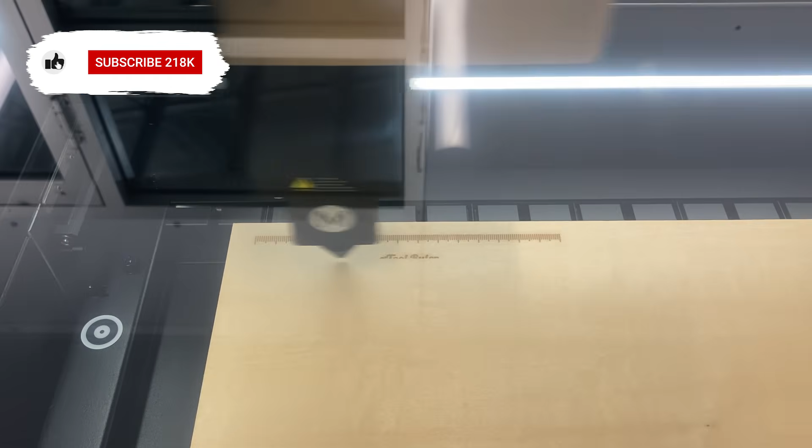In this video, we're going to get you all the way from not knowing what a laser cutter is, to getting your very first thing cut on an xTool P3. We'll start with some important safety, then look at how to create the design file you need for the laser cutter, then process it with xTool Studio software, and finally cut it out.

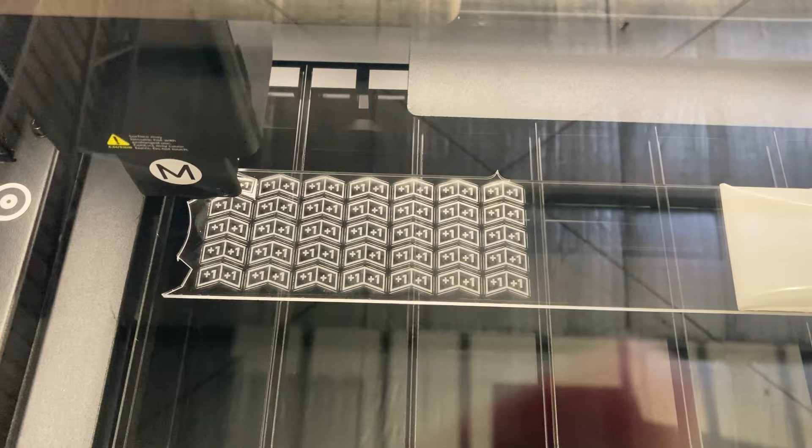Before we begin, this video may see usage in a public space such as a library or makerspace. If you are a member of the public using this machine, always double check with staff in case there are unique procedures or steps specific to your space. And of course, if you're watching this with your own P3 at home, do whatever you like, it's your machine.

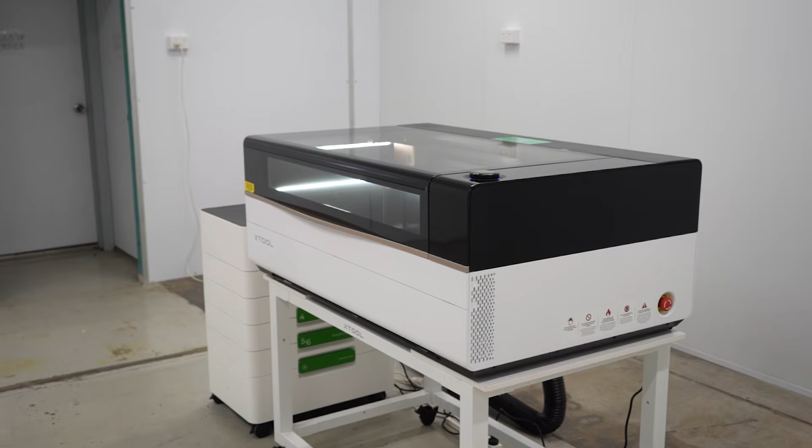First things first, safety. This machine is designed to be safe, and if you're using it properly and respecting the power it's capable of, you are not going to have any worries using this at all. Now that said, let's talk about some of the things this machine is capable of if you're not operating it correctly. The xTool P3 is a CO2 laser.

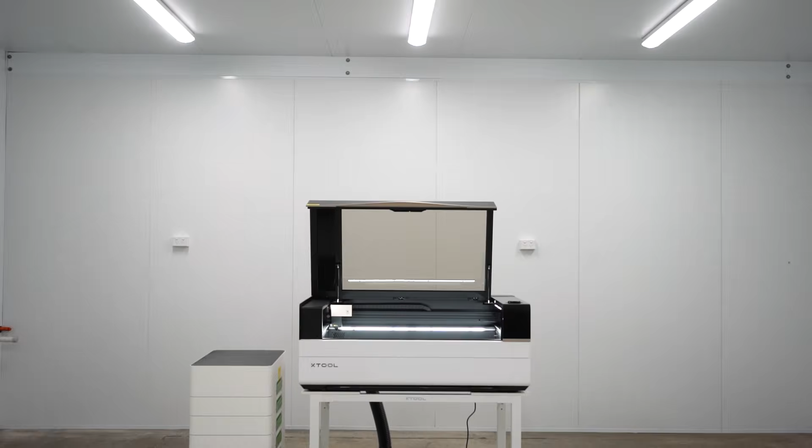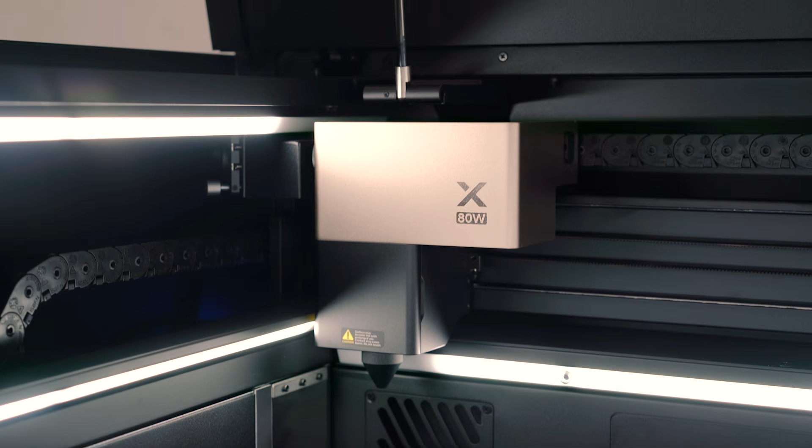It creates a super high power beam of invisible light that is bounced around with some well-aligned mirrors so that the laser enters the cutting head here and shoots down right into your material. The laser is focused down to about the width of a human hair, and this means that it's super concentrated and creates so much heat that it just vaporizes away material.

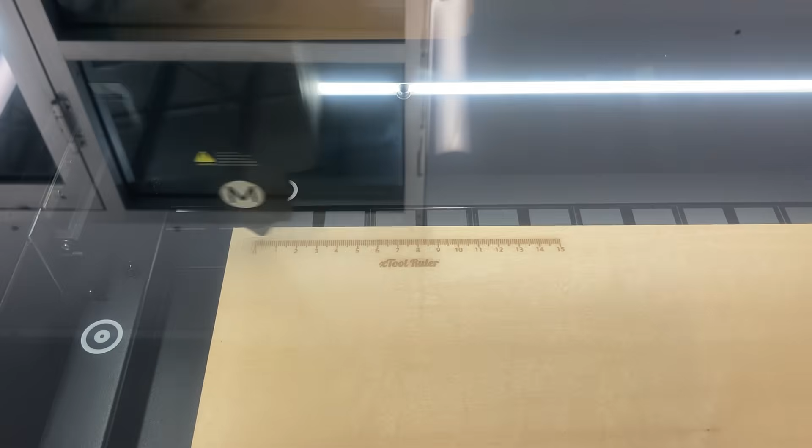With this, it makes it really easy to cut plastics and woods, metal a lot less so because it just reflects right off. The machine can also drop the power of the laser a little to instead burn the surface of the material, and this means it'll engrave the surface of your material instead of cutting it.

First things first, the laser is a danger in of itself. It does not discriminate between skin and wood, and it can instantly blind you if it reflects off something and hits your eyes. Now, we don't mean to scare you here because machines like the P3 are really well built, and that top lid is a special kind of glass that keeps all the invisible lasers inside the machine.

Additionally, the machine is designed to not work if the lid is opened. As long as you are using the machine correctly, it's safe. It's got the same laser class safety rating as a DVD or CD player. Those devices also have lasers in them that can cause eye damage as well, but the design of them means they're safe to use as long as you don't take them apart or modify it.

The second thing, this is a controlled burning. It's uncommon but not impossible to start a fire in this machine. You must watch the machine at all times while it is cutting in case a fire starts. If you leave the room, you must pause the job.

Even at MIT, there are cases of students quickly going out to get a coffee, and when they come back, half the lab is on fire. These fires in a laser cutter machine start really, really small, and if you catch them early, they are very easy to put out.

And finally, only cut materials on an approved list. The real danger is that not all plastics are safe to laser cut. Things like vinyl and PVC have chlorine in them, and when you vaporize these plastics, you create chlorine gas, that chemical weapon they used in the trenches in World War I.

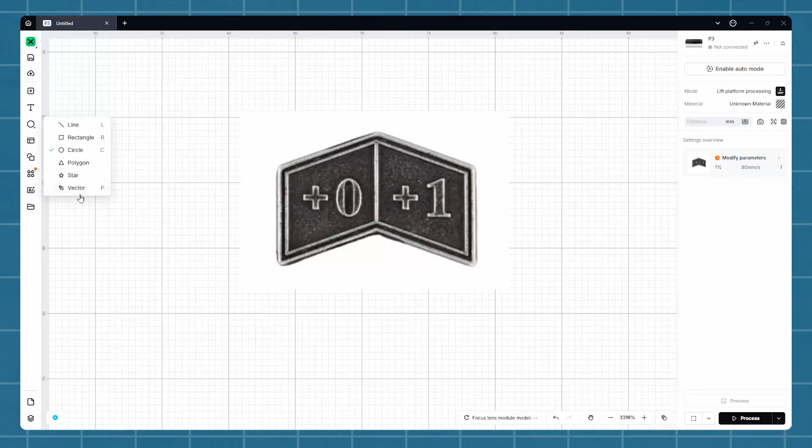xTool Studio has some basic drawing tools to make simple designs in it, and it's fairly straightforward. We will be doing a quick tutorial of this in the next step, by the way.

If you're looking to design something a little more complex, you might want to use an external software. The two biggest are Adobe Illustrator, which you have to pay for, and Inkscape, which is free. Both have their quirks, but both can do the job just fine. We're not going to do a tutorial on how to use these, as there are a million tutorials on the web already.

If you're getting your design file externally, you'll need to save the file as either a DXF or SVG. These are some of the file formats that xTool Studio will import. And just because it can be confusing the first time you encounter it, these are vector files.

Most of the time, an image is made up of pixels, and as you zoom in, it gets pixelated. We call this a raster image. Vectors, on the other hand, which is what our laser cutter needs, are images made up of lines defined with math, as in there's an equation telling how the lines should move. This means you can zoom in forever and never see a pixel at all. You don't need to be an expert on this, it's just a bit of context that helps, since we're dealing with vectors instead of raster images.

Alright, let's get going with xTool Studio. Go ahead and download it from the xTool site and follow the installation instructions. Nothing really fancy going on here.

Chances are, if you're cutting in a public space, there will be a certain computer connected to the laser cutter that you'll need to use to send your job to the P3. However, we can install xTool Studio on our own computer right now, design it and set everything up, then just put our file on a USB or something and open it up on the computer connected to the P3 and cut it out. So first things first, let's create a new project.

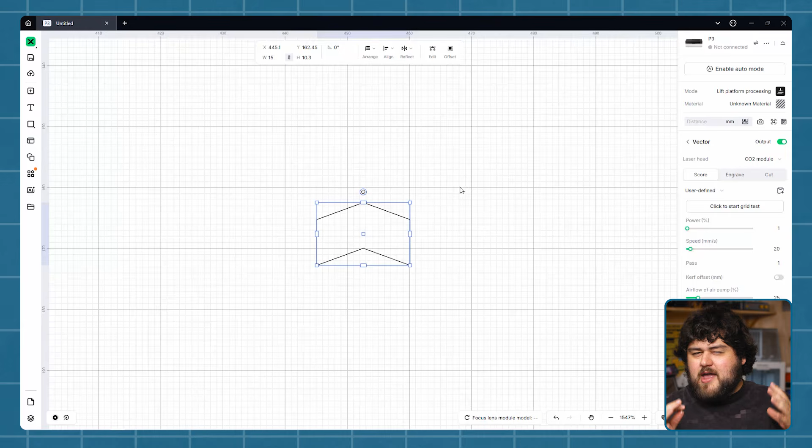I want to make some of these. We'll probably need some close-ups of this. It's a counter for a nerdy card game that I play, and I'm going to need a few dozen of them. But let's start by drawing one. I think as a first step, we'll make just a really simple one.

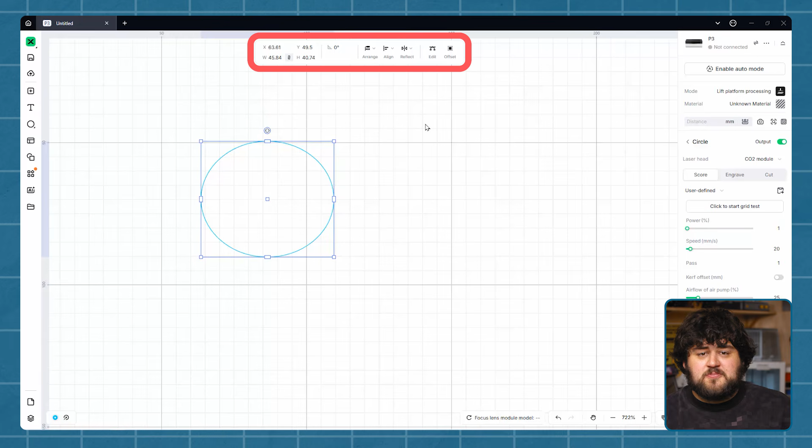I'm going to go ahead and select the circle tool, then click and drag to make the circle like so. Now, when I select this circle, you'll see this little toolbar appear at the top. Here you can set the position, size, and alignment of your object, as well as a few other goodies on the side here. Now, I want this counter to be 15 millimeters wide, so I'm going to set 15 millimeters there.

Let's zoom in by pressing Control and using the scroll wheel. I also want it to be 15 millimeters tall so that it's nice and perfectly round. To do this, I will need to unlock the aspect ratio with this button here. And now if I go ahead and change it, I can do it.

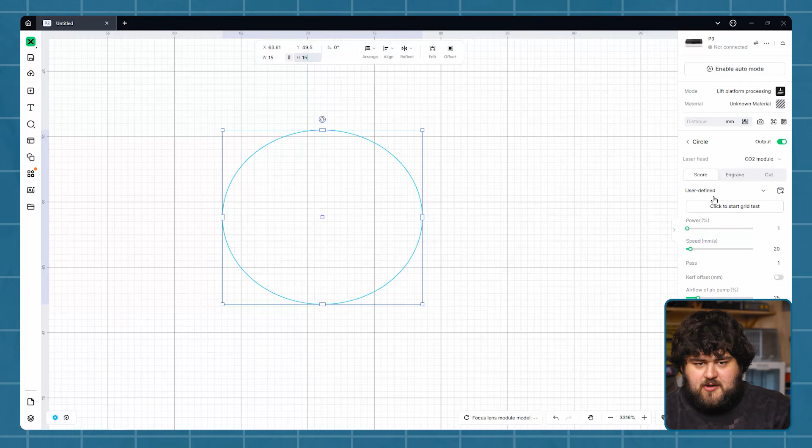If I didn't unlock it and tried to change this number, it would change that number as well. This aspect lock ensures that your shape can't be squished or squeezed in one direction. Also, when you're designing, it's always handy to have a ruler or set of calipers on hand so you can visualize how big things are going to be.

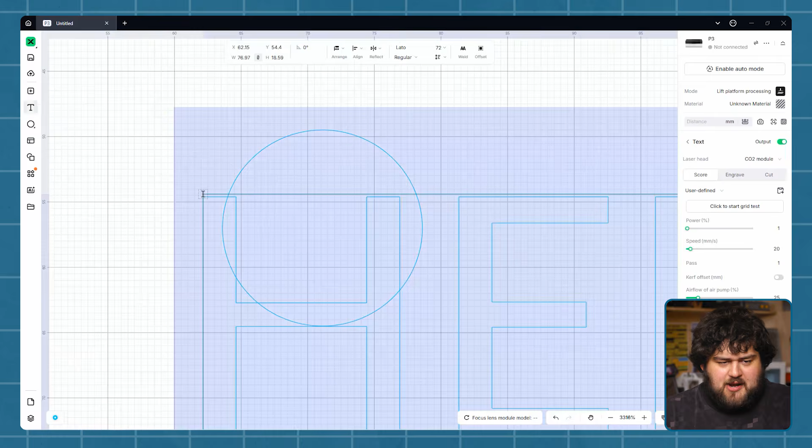So I can see 15 millimeters here and go, yeah, that's big enough. Alright, let's go ahead and use the text tool to add some text to it. I'm just going to need mine to say +1/+1 on here. Then I'm going to go ahead and drag this to about the size that I want. When we select our text up in the toolbar, you're going to see our text related options, and I might just go here and change the font while I'm at it. I kind of like that one, and I'm just going to go ahead and resize that for our coin again. And that is looking pretty good.

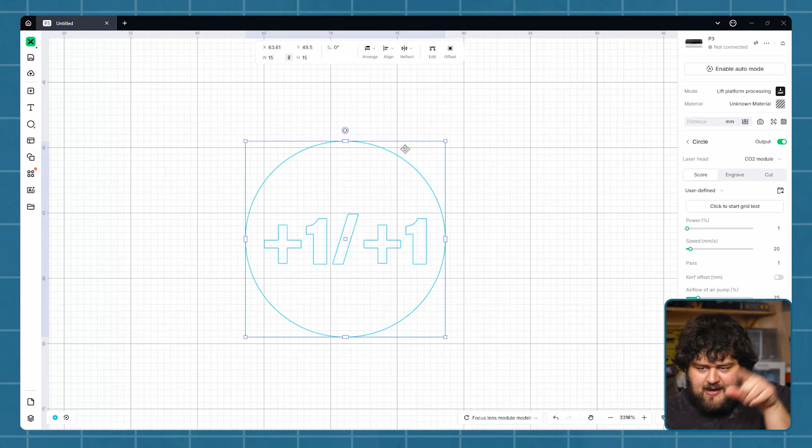If I was happy with this and wanted to finalize it, I could go ahead and start assigning the cuts and engravings to this. So if I select the circle, because I want to cut out this circle, I can go ahead and select cut. And if I select the text, I can go ahead and select engrave. As you can see, it fills it in. From here, we can move on to the next step.

But I think this looks a little too simple for what we can do with this machine. So we're going to go ahead and make something a bit nicer and explore some of the other important tools.

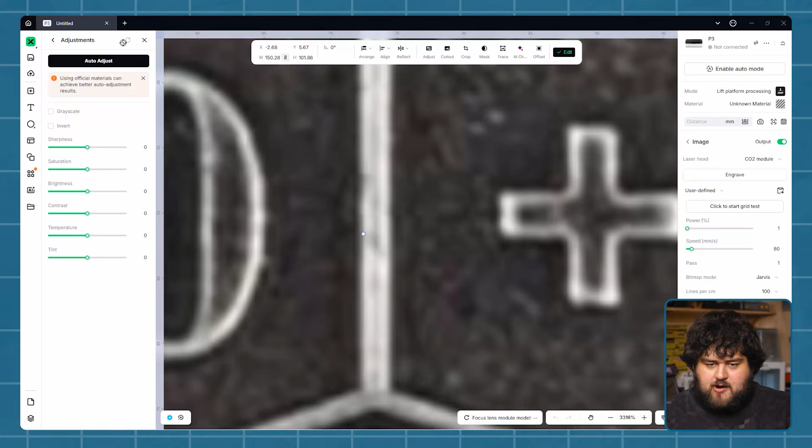I want to try and copy a set of counters that I already have, and I actually have a photo of it. So we can go ahead and actually import that photo, and I'm going to bring it in like so. Oh, that is really, really massive. Far out, that's big. Now, importing this image isn't going to magically let us cut this exact looking thing with all the detail and everything on it. We're just going to be using it as a drawing reference.

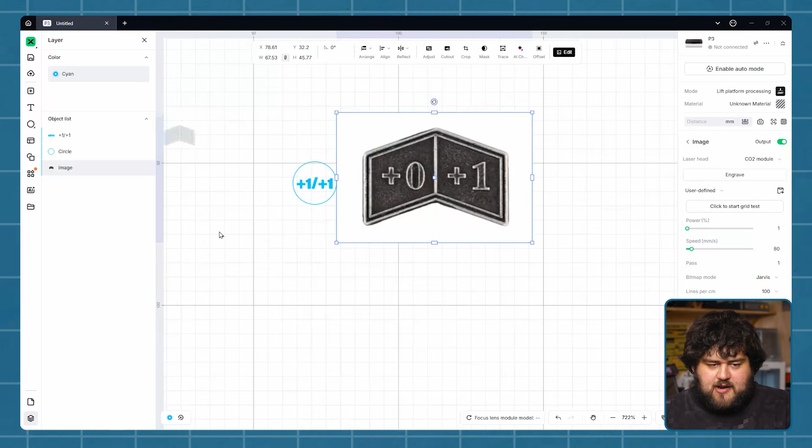So first of all, I'm going to go ahead and make it a little bit smaller. As you can see, it's sitting above everything, so I want to go ahead and go to layers, click on it in there, and then drag it to the bottom. As you can see, it's going to be under everything else. While I'm here, I'm going to drag this image to be about 15 millimeters as well, which is how wide I'm going to want my counters to be.

Now we can just go ahead and select our circle, hit the delete key, select our text, and hit the delete key as well. Now what I'm really after is drawing that kind of outline pointing rectangle shape of my counter, and there's a few different ways that we can get this.

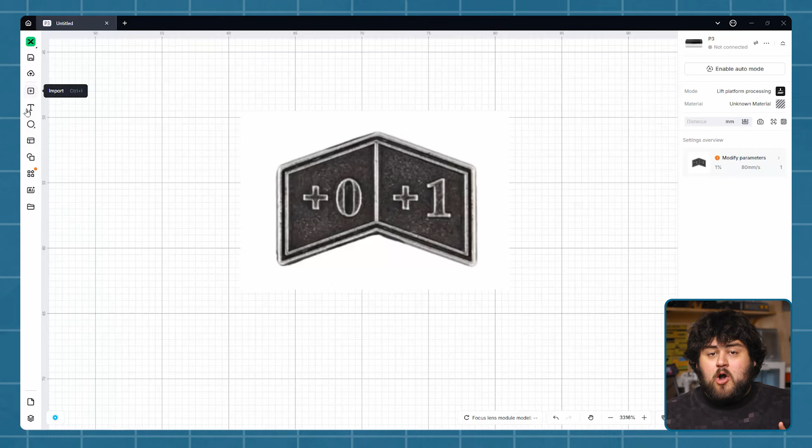One of the most common ways that you'll create shapes is with the pen tool. This is really our bread and butter of vectors. You can not only click to add points, but if you click and hold, you can also create curvy lines like so, and then you can adjust them by selecting the dots. As always, there are important tools up in the toolbar that you might want to check out. This is going to let you change how the curves move and interact with each other.

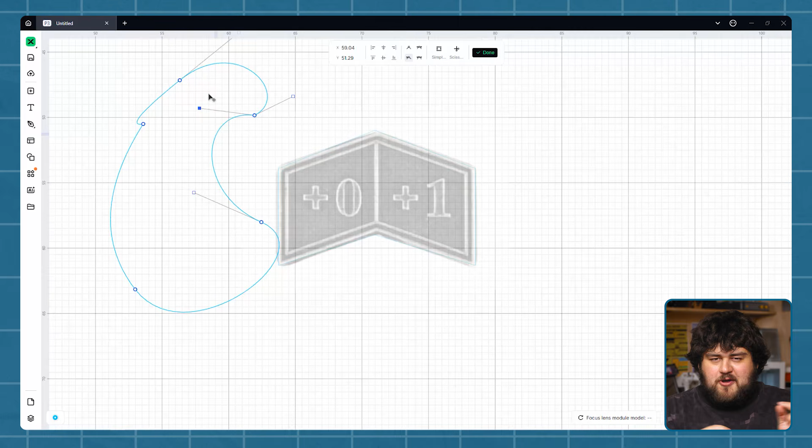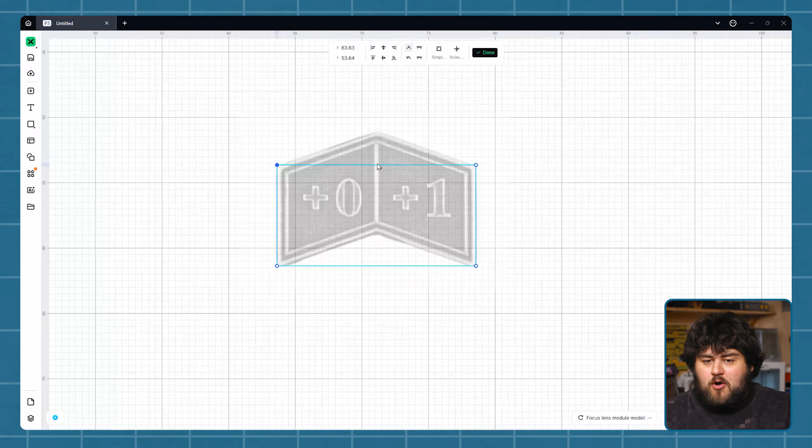I'm going to go ahead and delete that thing that we just drew, because the other way we can do this is that we can draw a basic shape and then modify it. Here I'm going to go ahead and create a rectangle, and I'm just going to drag it from point to point to point like so. Then if I double click the rectangle, I can go into this editing mode, I can hover over a line and then click and drag to create a new point like so. I'm just going to go ahead and create a bottom one as well. And with that, we got the exact same shape.

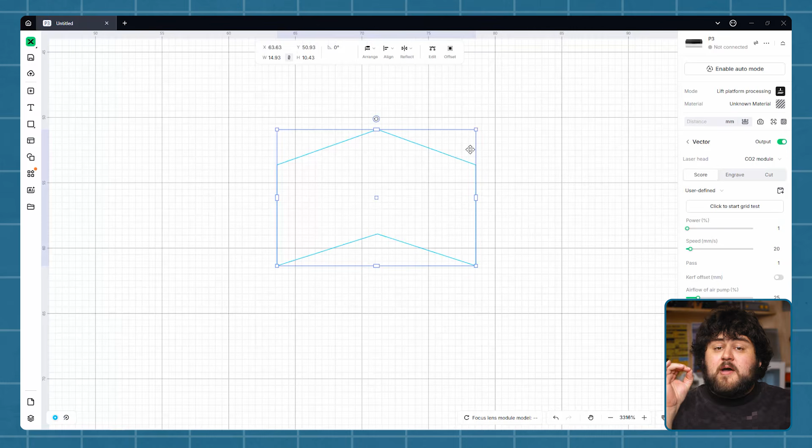Now, I don't really need this image anymore, but I might keep it around in case I need it. So I'm going to go ahead down to layers again, and I'm just going to hide it in our layers like so. Now let's add some detail to it. One of my favorite tools is the offset tool. This is going to take the shape that you have and then either make it smaller or bigger by a certain amount.

I'm going to make the shape about 0.5 millimeter smaller on the inside, like so. Then I'm going to take this new line and repeat that once more.

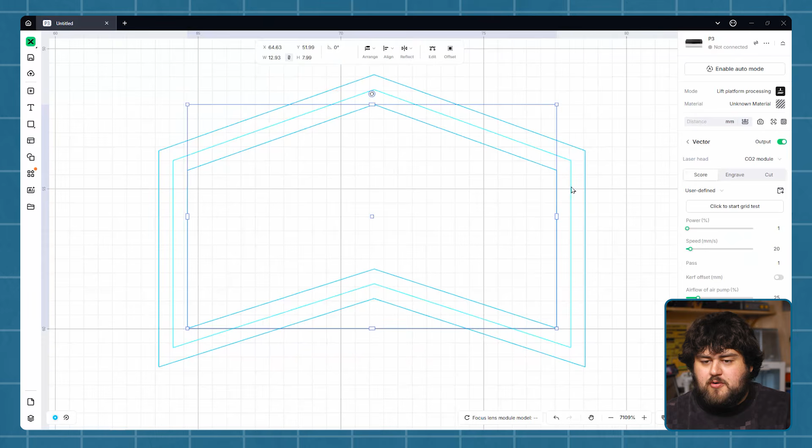I can then select these two shapes by clicking one and then pressing and holding shift and clicking the other. If I go up here, I can make these a compound vector. This is going to merge the two lines into one shape, creating sort of a square pointing arrow donut kind of deal if we drag it around.

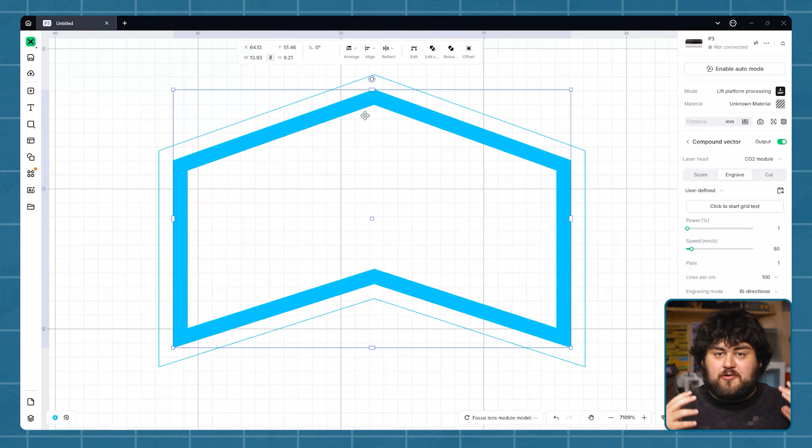Why did we do this? Well, now we can select our new shape and hit engrave, and we engrave the area between these two lines. I'm intending for this outer line to be a cut, so it's going to cut, have a bit of clear acrylic, and then have this laser engraved rim around it.

If we unhide our reference image, we can see there's a line going down the middle, and I'm just going to hide that back again. Let's go ahead and draw that simply with the rectangle tool, and I'm just going to draw that in, then size it correctly.

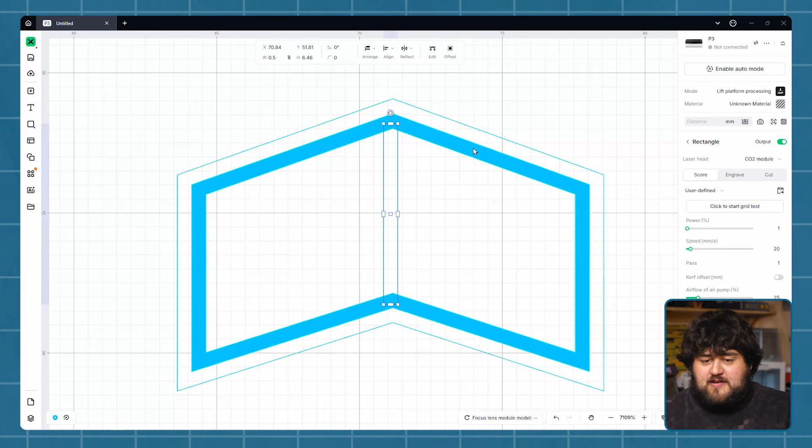Now I'm going to select the rectangle and press and hold shift to select our other shape. If we go up to our combination menu here, we can hit unite. This is going to take the area of both of those shapes and turn it into one new shape. The tools under this combine tab are very powerful, and you should experiment with them.

I'm then going to finish our part by putting in some text exactly like we did before, just fast forwarding through all of this editing.

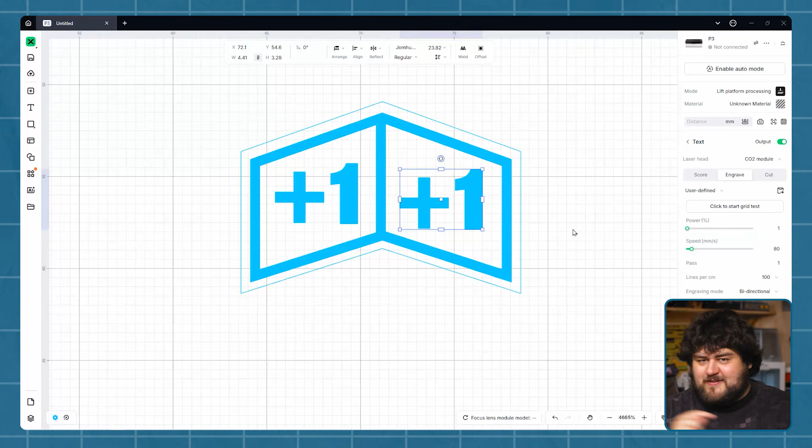Now I am quite happy with this shape, so to finalize it, I'm going to select everything and click group here. This is not turning it into one compound vector, it's instead just putting it all together as one unit. So now if I click this, we can drag and scale and treat it as one object.

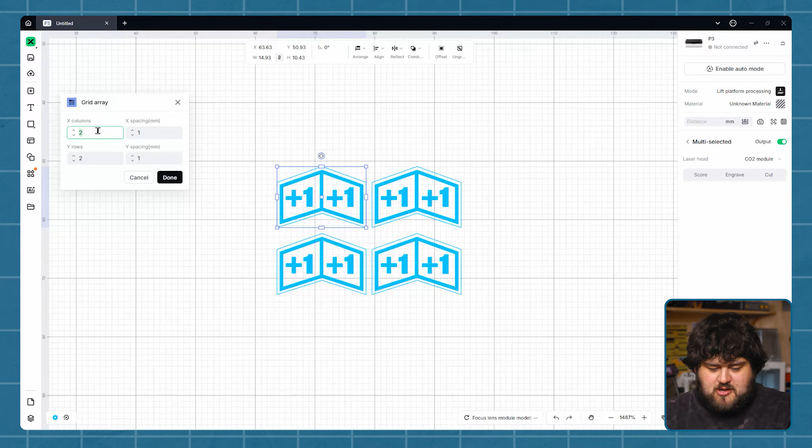Now I need to cut a few dozen of these out. So instead of copying and pasting it multiple times over and lining them all up, I could select it, go to our advanced tools, and select this grid array, which is going to let me duplicate it a certain amount of times, however many I can fit on my sheet of material.

This might be a bit smarter to do once you're in the final step and you can see your material and line it all up. But for now, we have our shape. We created something pretty cool given how simple the tools we have access to are.

So now I'm just going to save it locally. You can put it to the cloud if you want, but I'm going to save it locally so I can put it on a USB stick. Now I'm going to move to the computer that we have connected to our P3 and open my file up on there.

Wow, look at that. Here's some pre-recorded footage we prepared earlier of us getting this exact shape cut out on our computer on the P3.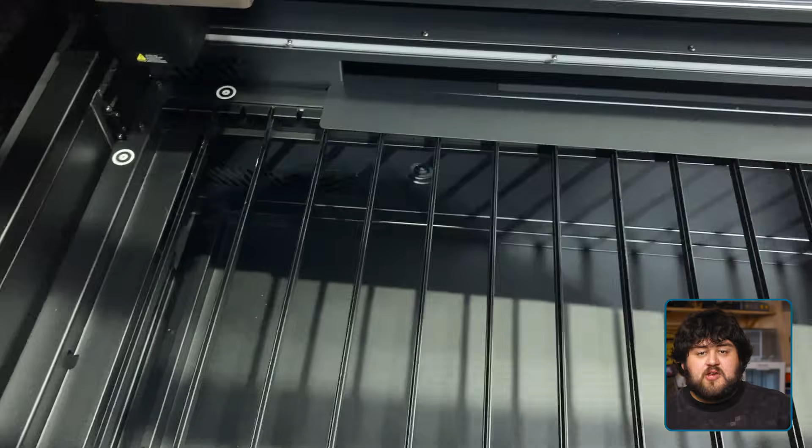Then open the lid of your machine and put down the material that you're going to be cutting. I'm just using an offcut of 3mm acrylic here. It doesn't really matter where you put it as long as it's within the cutting area.

Then with the lid open, move away and give the camera in the top of the lid a moment to scan your cutting area. When the light turns green, you can close the lid.

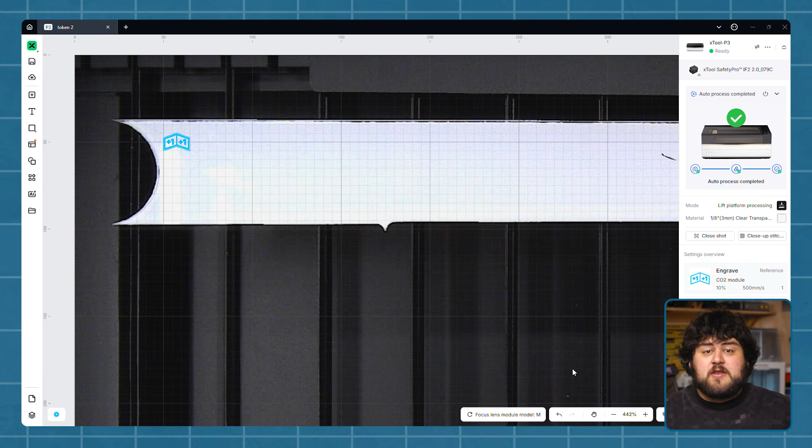This is one of the fantastic things about the P3, by the way, because you should now see that scan in xTool Studio. This is going to be a massive help in lining up our design on our cutting piece. Now the machine will be moving around and automatically setting the focus of the laser, but if in the top right you see this auto process completed, you are good to go.

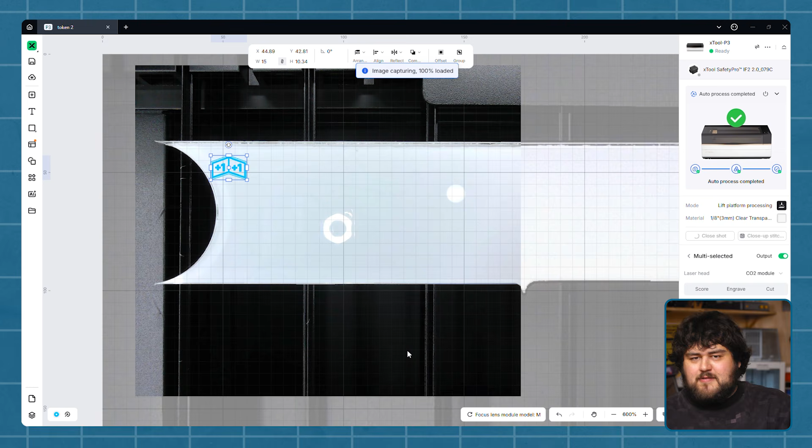Now this image is great and we can go ahead and happily line up our piece on it, but if you really want some precision, you might want to use the close-up camera. In your workspace, select an area and the second camera on the cutting head of the machine will automatically move to that position and take another photo. This is going to give you a more high resolution image with more accuracy. This close-up image, by the way, is usually pretty darn accurate and you can line things up down to easily 0.5 millimeter of accuracy, which we're going to be doing here to try and really use all of this scrap piece of offcut.

Now we need to tell xTool Studio what material we are actually going to be using. This can be done by clicking on the material section here and then choosing one of the presets.

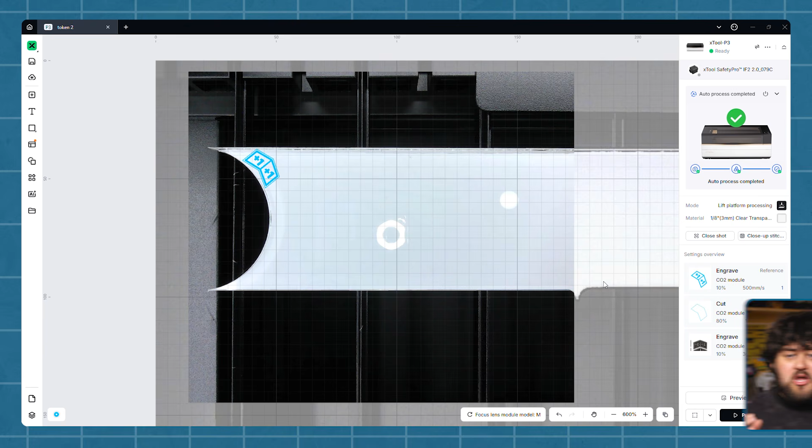With that, we can now go ahead and hit the process button. This is going to give us an estimated job time of how long it's actually going to take to cut, as well as a path preview, which is going to show us how the machine is going to cut and engrave our part.

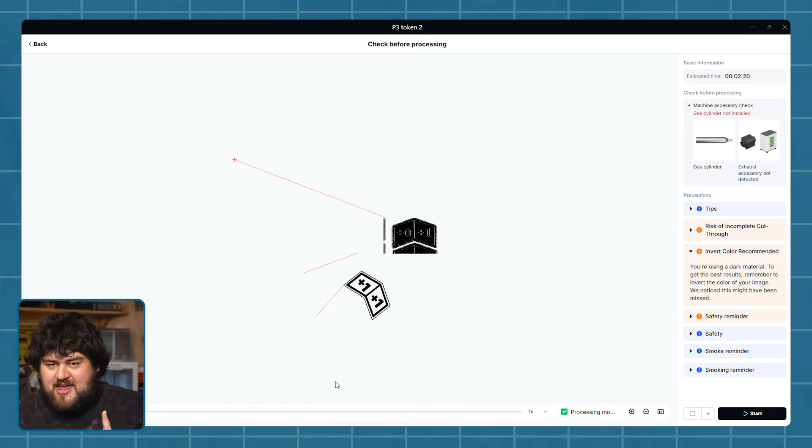We did, however, forget something here. We hid the image in the layers, but it will still try and engrave this image out. To fix this, we need to head back into layers and delete it, or under the cutting settings of the image, we can disable it from the output.

And with that, we can go ahead and process again and hit the start button to send the job to our P3. And on the P3 itself, you'll need to go ahead and press the button to start the job as well. Remember, you must keep an eye on the machine while it's cutting.

If for any reason you want to pause it, just press the button on the P3 again, and pressing it again will resume your cut.

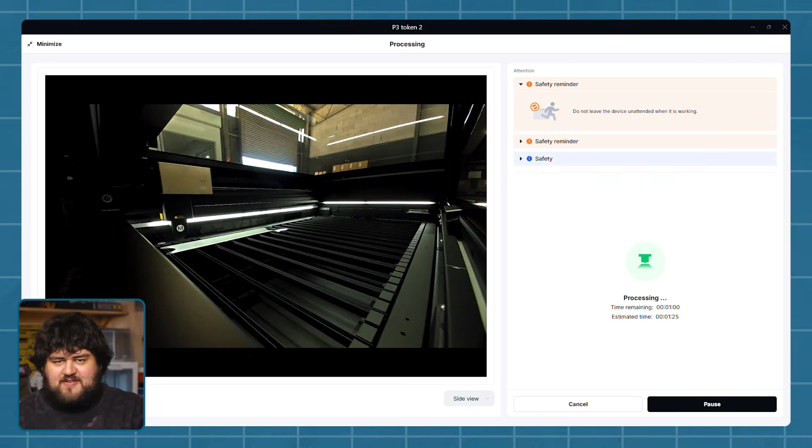During the cut, you can see roughly how much time is left in xTool Studio, as well as get this cool viewing monitor camera inside of the machine. It's really funky. Also ensure that you have the air extractors or air filters running during the cut.

This is mainly in case you have any that manually need to be turned on. If you're using any of the xTool ecosystem, it's probably already paired and automatically running.

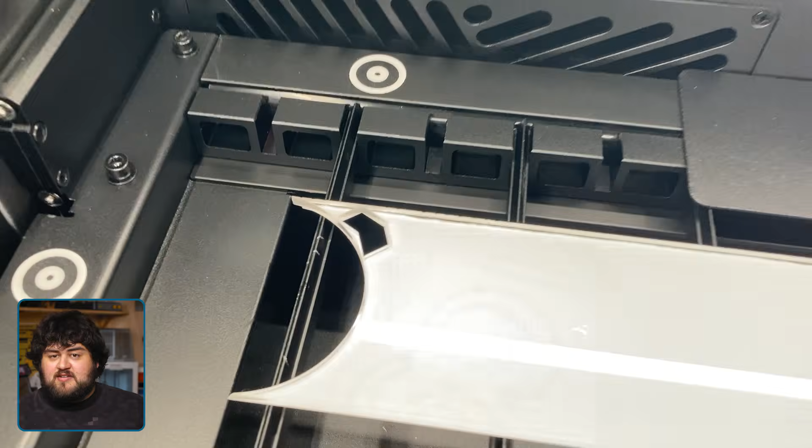Once your cut's done, let the machine sit for a good 10 to 20 seconds before opening up the lid. This is just to ensure all of the bad fumes get extracted out. Then go ahead and remove your parts and ensure that you remove any scraps or anything that might have fallen into the machine. You want to keep your machine as clean as possible.

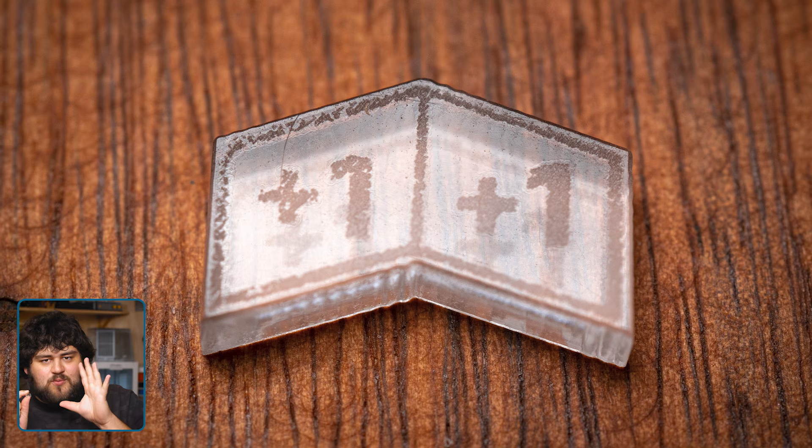And that is our first part cut. Now, good thing we only did one because the engraving job is pretty subpar. The cut is fine, but the engraving is struggling on a part this small.

To fix this, we'll simply change the lines per centimeter from 200 to 300. This is kind of the resolution of the engraving that we're going to be doing. And then I want to just maybe make it a tiny bit bigger, so I'm going to change the width from 15 to 18 millimeters.

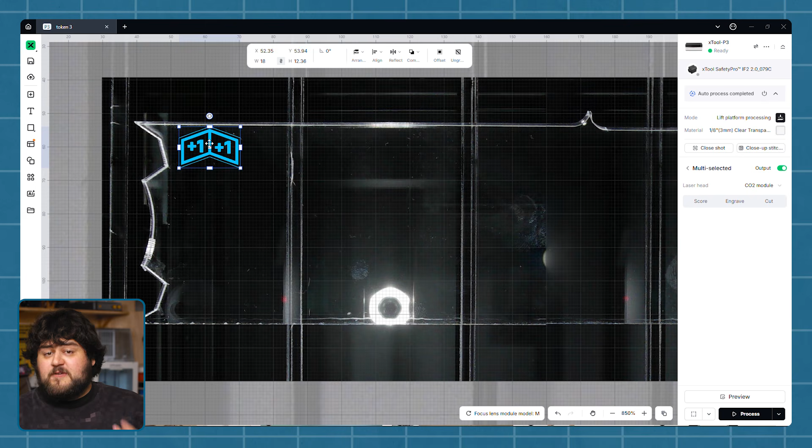At this point, I was pretty confident that it was going to come out well, so I laid a few dozen of them out on my scrap bit of material. You can just copy and paste them as many times as you want, or you can use the grid tool if you like. With your parts all laid out, you just hit process again, exactly the same.

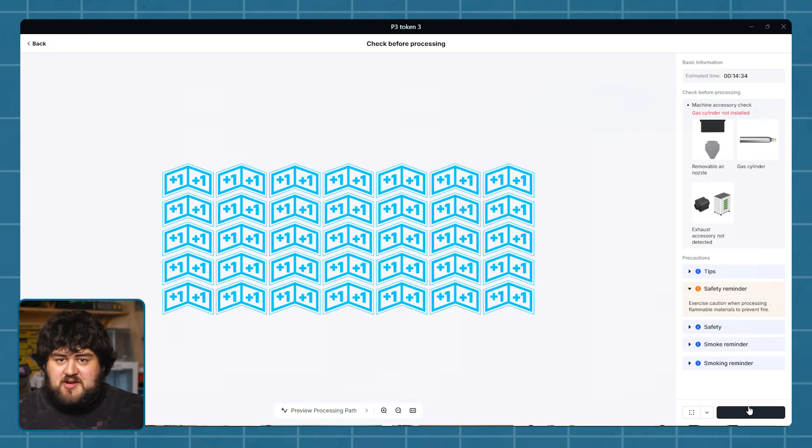It looks good on the preview. Hit start and then hit start on the machine as well. And hey, look at that—15 minutes later, it's been more like 3 days since we filmed that footage, we have our counters ready to go. Increasing that resolution and making them just a tad bit bigger really helped us out here.

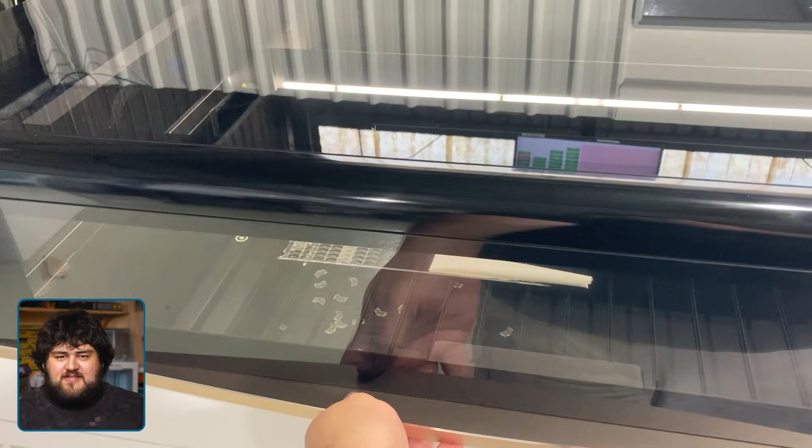Just to drill it into you, with my parts done, I'll go ahead and check that I didn't leave any junk in the bottom of the machine. And then I'll go ahead and close the lid and switch off the machine and air extraction and filtration if needed. And that is how you go from nothing to getting a part cut on the xTool P3.